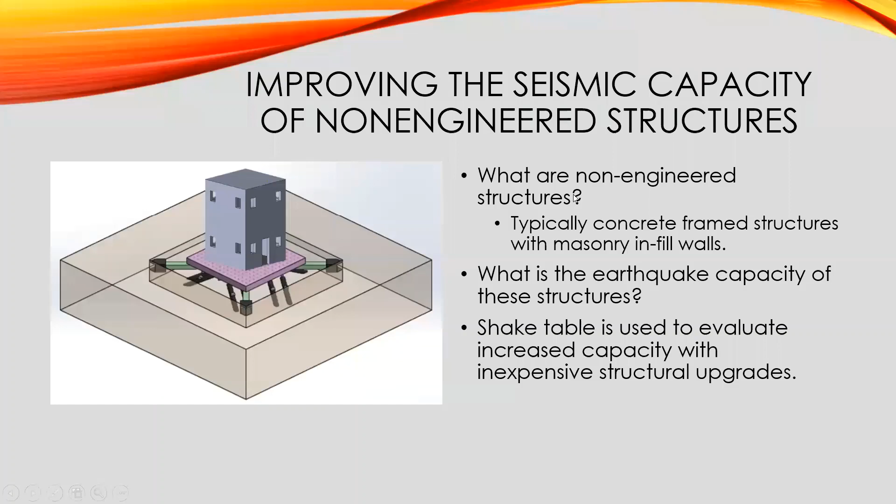But in any case, it has been in existence for about 1,400 years and has survived many earthquakes. And so the researchers were very interested to understand how it has been able to survive earthquakes and how the structure works in the case of this historical structure. They found out many interesting things indicating why it has significant seismic capability, even though it was designed 1,400 years ago.

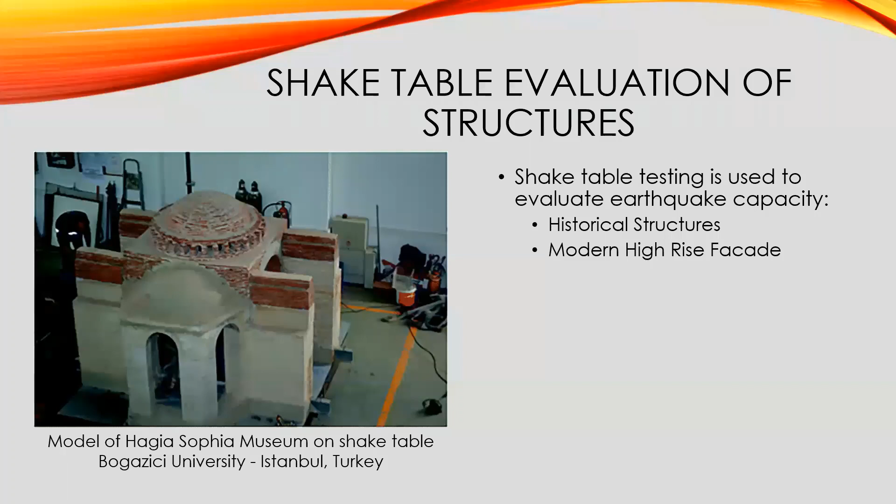The shake table will shake the soil box. The soil box will have soil in it, but with a model of a foundation. This could be a machine foundation, for example, a turbine, or any other kind of structure. And it is possible to measure how the structure responds inside the soil, inside the box, and therefore do a complex soil structure interaction analysis.

The reason there are two boxes is that the less expensive boxes are the rigid wall boxes, in which there is just a steel or aluminum box where the soil is placed. But this can introduce some inaccuracies because the soil box is not infinite. When you have a foundation, there's a great amount of soil around it. And so when the foundation radiates energy, the energy travels away and never comes back to the foundation. But in the soil box, the energy can bounce off the walls of the soil box and come back and affect the answer. And so that's why in a more expensive setup and experiment, people will use these laminar boxes.

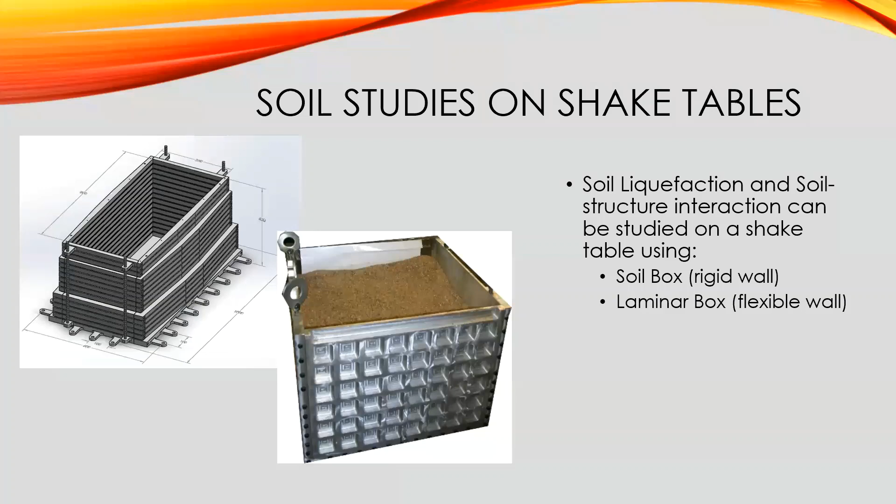But for example, a very important testing program that is going on in the United States and other countries is the ability of mechanical equipment in critical buildings to survive an earthquake. People are very concerned about the equipment inside police stations, fire stations, and hospitals, because after a large earthquake, it is very important that the services of the police, the fire department, and doctors continue. And so it is not acceptable that these buildings will stay up, but the equipment inside would fail.

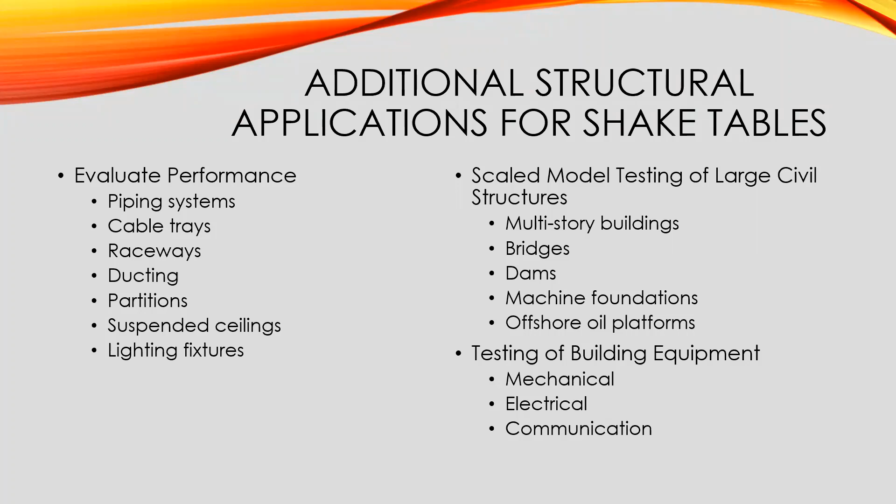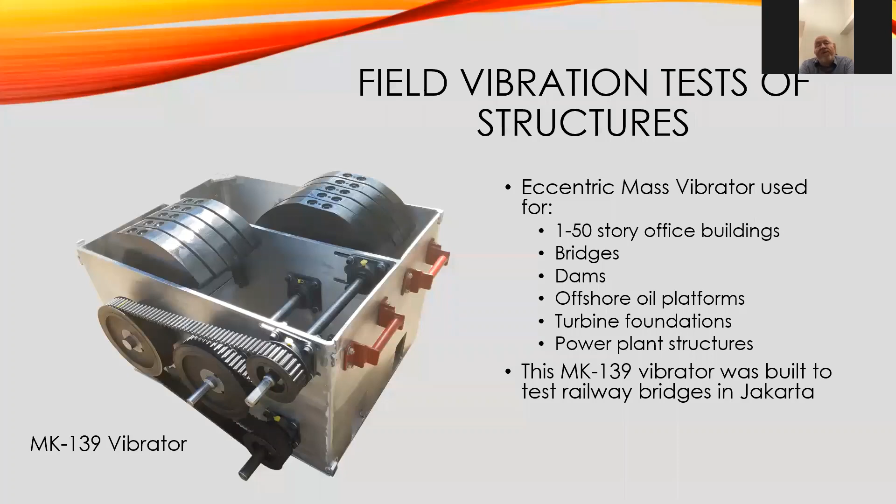This is something which might be much more familiar to you than shake tables or eccentric mass vibrators. But they are also a useful way of solving some problems, such as the failure of panels and beams, by testing them statically or dynamically with hydraulic actuators attached to these kinds of reaction frames.

In particular, I am thinking of one project that was done at Drexel University in the United States, where it was a desire to accurately model the vertical and horizontal capacity of a masonry wall. And so they put a masonry wall in one of these frames with 2 vertical actuators and 1 horizontal actuator. The horizontal actuator would shear the wall to simulate earthquake excitation.

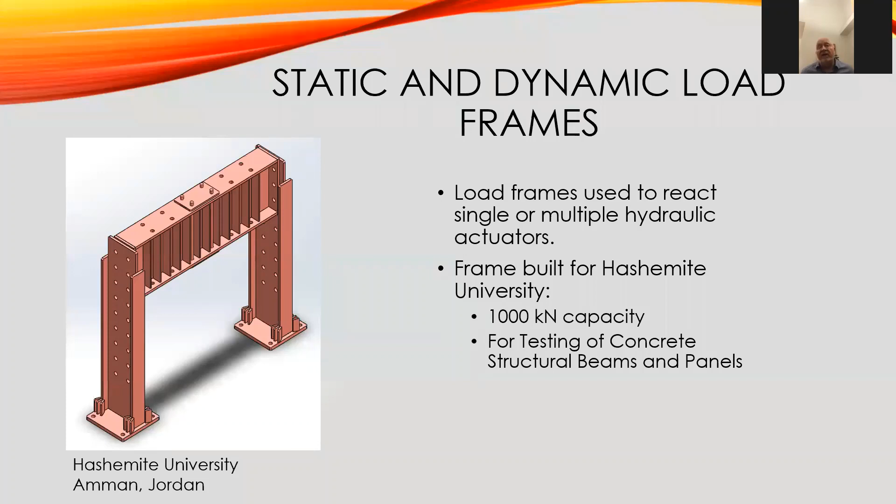Right. There is always the problem that sometimes structures are too big or too expensive to do testing. And so, especially in soil dynamic studies, people would like to do scale model testing of structures in soil. And sometimes the scale factor is a factor of 100 or more. And so it's necessary to do analysis and understand how the performance of a model 100 times smaller than the real structure compares to the real structure.

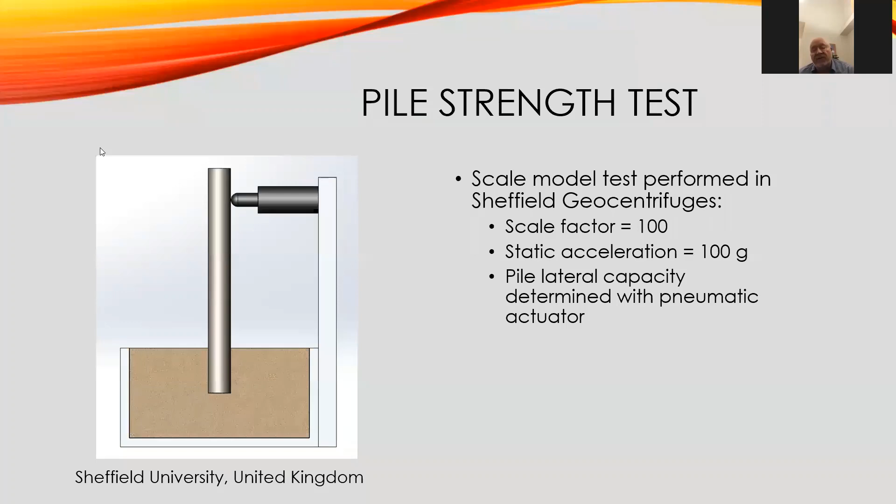And in this manner, many universities can analyze these complex soil structure problems and improve their computer models and get better, safer and more economical structures. Well, that concludes our presentation. That was a lot of examples, and we only very briefly got into each one.